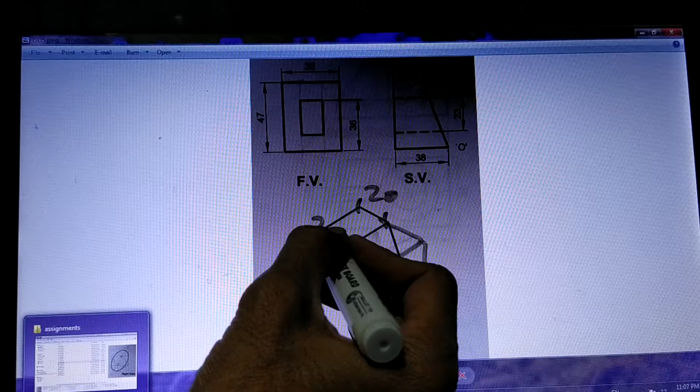We mark this point at a distance of 20 from the backside. Now this point is to be joined to this corner, so you join this corner, and now you get the revised shape of the box after it is cut like this. So simple it is. We have seen how to draw this box.

Now having done this much, the next thing is to bring into picture the hole. Suppose we have first ignored the hole and drawn the outer box. Now let us try to bring into picture this hole which is there. So what will happen because of this hole? The hole is opening like this, and it is opening on an inclined surface.

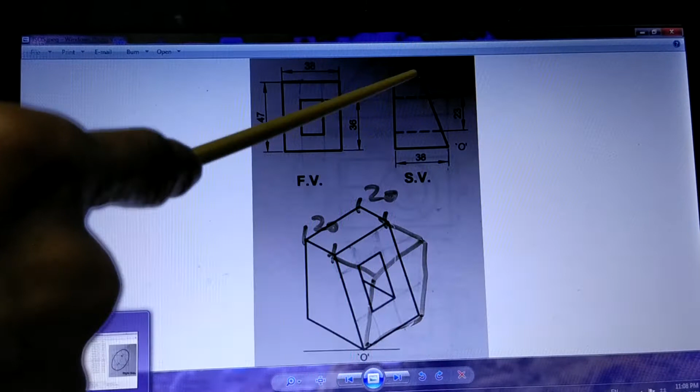So you have to draw this rectangular shape on the inclined surface. Now what do you do here? The job is simple. All you have to do is measure a certain distance. How is that to be measured? I'll just remove this.

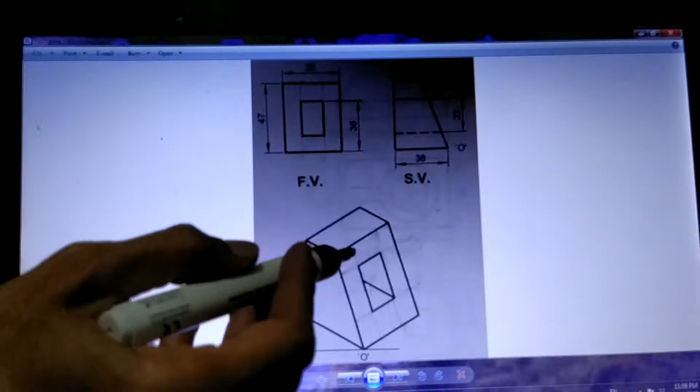You have to measure this distance from here to here. Whatever is the distance from here to here, you measure in your divider, and that distance you mark from here to here. Same way, further from here to here, whatever the distance, you mark here.

Once you mark these distances, we draw a line like this. But this line you draw parallel to this line, parallel to the base line which you have drawn, which is of course the 30-degree line. So you draw a line from the two points which you have got here. It is like a reference between these two lines, and you have to draw the rectangle.

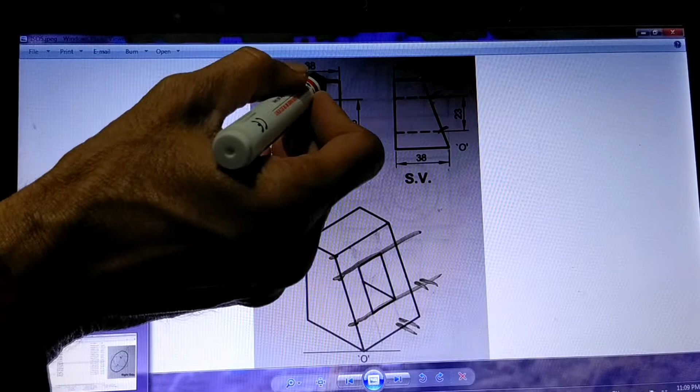Now we have drawn these lines. Now we need to draw vertical lines. So from where do you get vertical lines? You measure this distance. Whatever this distance is from here and here, you mark these distances on these two sides.

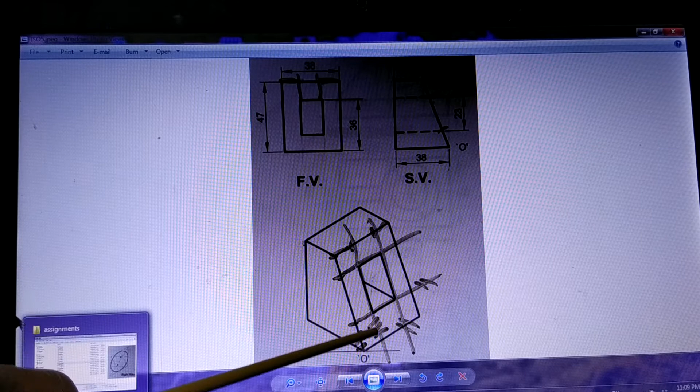Once you mark them, we draw a line like this. While drawing this line, these are parallel. This line is drawn from this point such that it is parallel to this line. Now this is not an isometric line. Remember, this is an isometric line, this is an isometric line, this is an isometric line - those are the 30-degree lines.

But this line which is formed after it is cut is a line which is not an isometric line. So therefore, this line also is not going to be isometric, and this line also is not going to be isometric, and this line is also not going to be isometric. So we have drawn all these lines, and once you draw them, you have formed the necessary outline of the rectangular hole. This hole is coming out from this surface here, and the shape is like this.

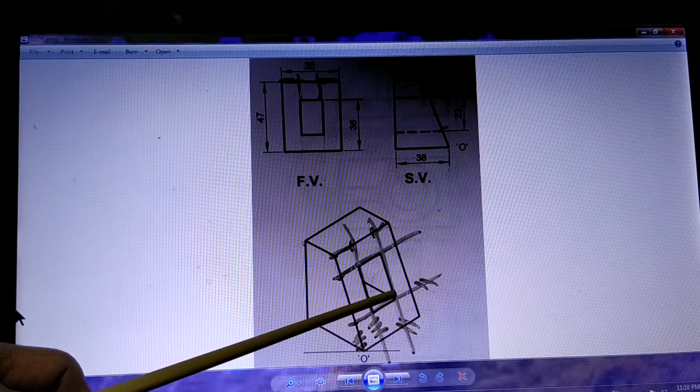Now what is left is this corner. There is one corner here which is seen. So for that, from this corner you have to just draw a line which is an isometric line of this type, parallel to this line, parallel to this line, parallel to this line. So you draw from here one line, and that will complete the job, and we have drawn the necessary figure. I'll just remove the procedure so that you will have a good look at the actual figure.

So this is how the figure is, and we have learned how to draw it. In this case, what we have learned is how to draw a surface which is a non-isometric surface. This surface is non-isometric, and we saw how to draw it.

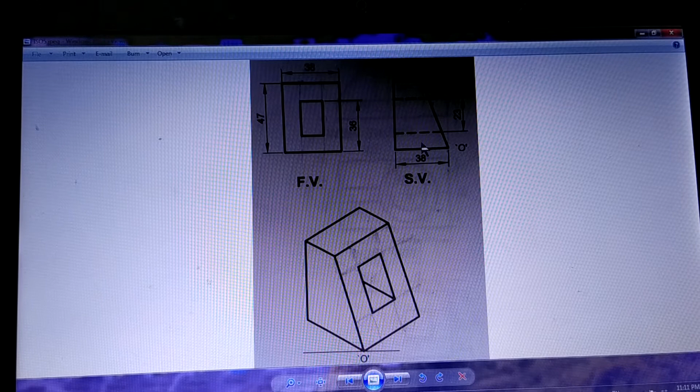Now let's take another example.

And as you can see here, what you can also do is you can think of the object one part at a time. So let us concentrate only on this much part. So don't look at this part. I'll just hide this. So you are concentrating only on this part and see how it looks. The way it is drawn, front view is like this, one dotted line here, and the top view is like this.

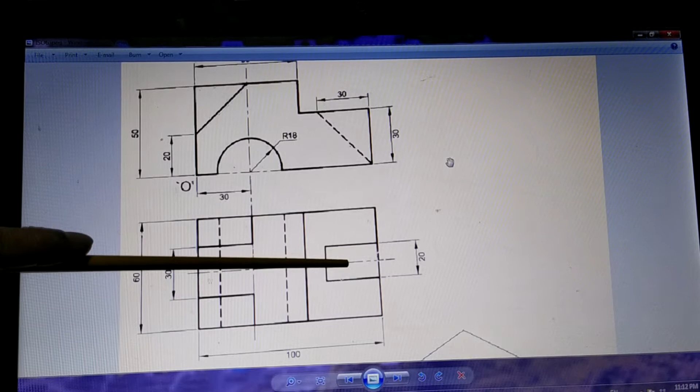Now there is no line here. It is seen, but there is no line here. So it is like a cutout. In fact, this line will come because it is an inclined surface. The surface is still here, so this line will be there. Yes, this is inclined surface. So you can interpret how this shape is. Now once you have interpreted this shape, then you move further here.

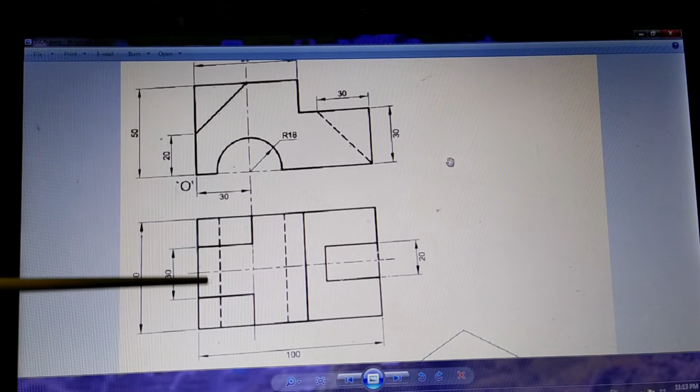Now in this part you can see this is the shape corresponding to these lines, but in addition there is one cutout like this. Now this cutout is dark. That means from the front it is seen, and from the top also it is shown like this. That means these cutouts are on two sides. This inclined surface is here and here. And in this case the inclined surface is at the middle. Because it is at the middle, when you get the front view, it is not seen, so it is dotted.

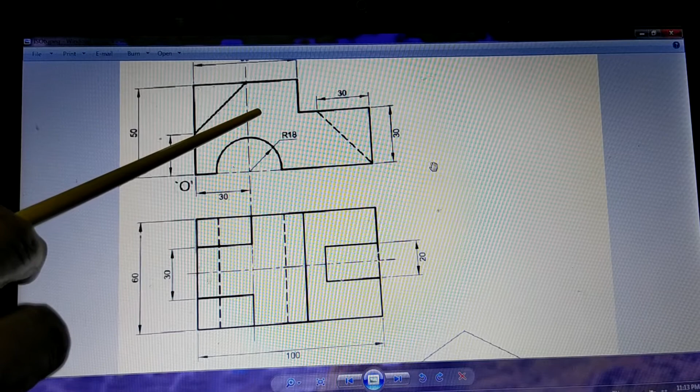So now what we do? We have understood the object except this part. The rest of the things are discussed. So you can draw this object and then we will see how to draw this. Because this is corresponding to this place, we know where the center of the arc is, and we can even think of a half rhombus inside which it is fitted. That we will see as we go further ahead.

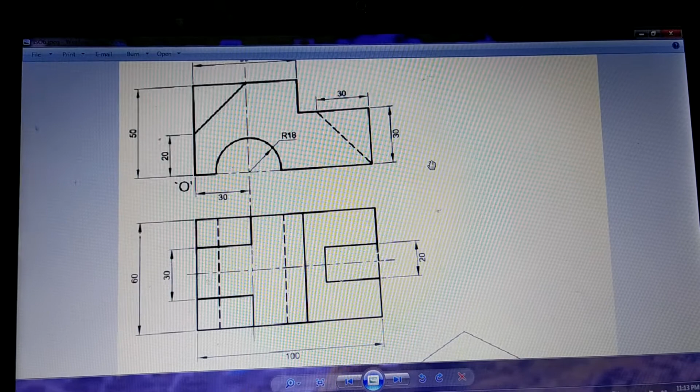There is one point O written here, meaning that you take this corner as the front corner, so that this side will come on the front, this side will go at the back. So we have already got the figure with us. You can see this is how the figure will come. So these two cutouts are there, which are inclined. These two inclined surfaces are here. And this inclined surface is here, but it is not seen, it has gone behind.

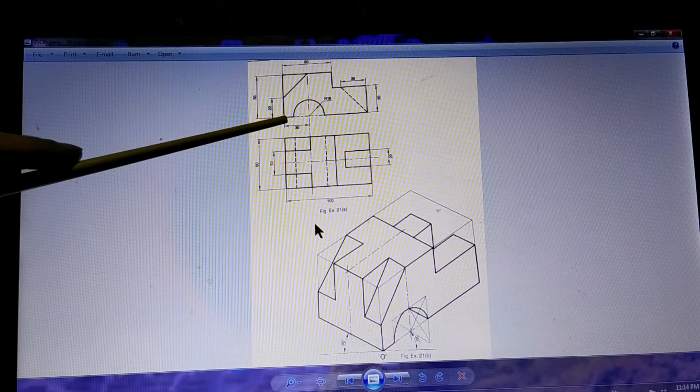Now comes the semicircular hole. So let us see how that is drawn. You can think of this part. From this point to this point, we are going to fit a semicircle. All you know is the diameter of the semicircle. By the dimensions you can get this one end and the other end of the semicircle, and we are going to draw the semicircle by drawing two arcs. There will be one small arc here, and one large arc here.

So what you do is you draw this half rhombus by the dimensions, and then from the middle you draw this line, so that you come to know that from this point to this point you get the small arc, and from this point to this point you want to draw the larger arc. Once you know the ends of the arcs, you know how to draw the arc. So now what we do is,